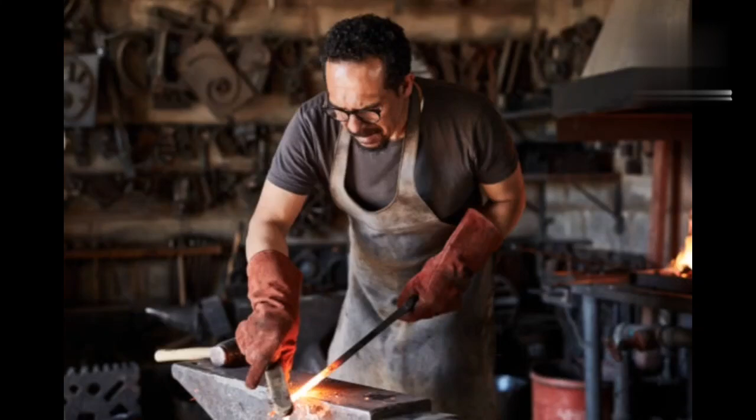Hey everyone! Today we are going to cover all possible Viva questions from Black Smithy shop.

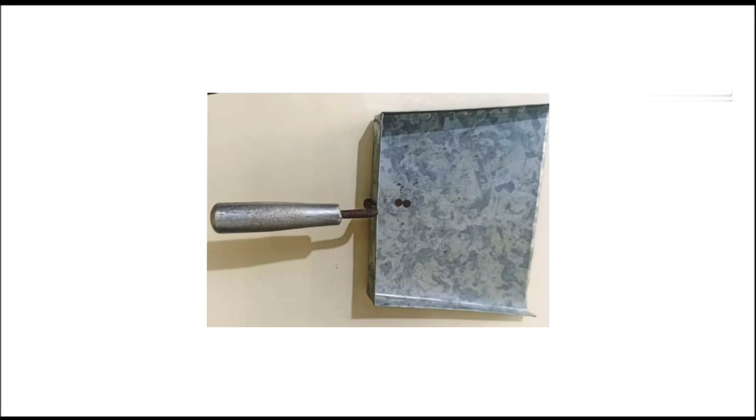So let's get started. First of all, let us understand the purpose of this shop. Basically, we are supposed to make a dustpan here, which has three parts: a galvanized iron metal sheet, a mild steel rod, and a handle. We are supposed to make the mild steel rod in the Smithy shop.

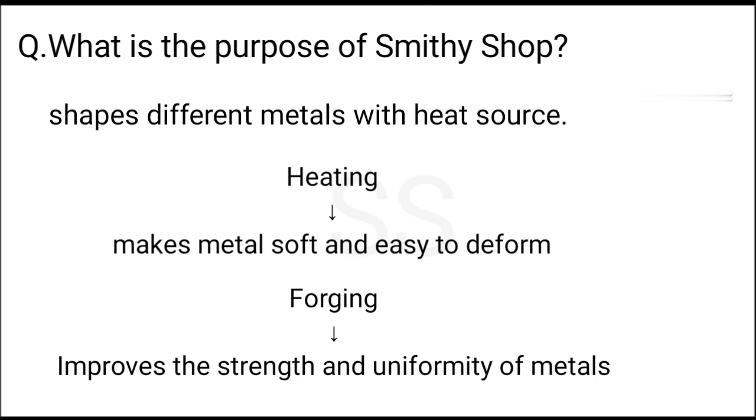Hence, we can say that a smithy shop is used to shape metals by heating and hammering them. Heating makes the metal soft and easy to deform. Forging improves the strength and uniformity of the metal, especially for parts subjected to continuous stress and load.

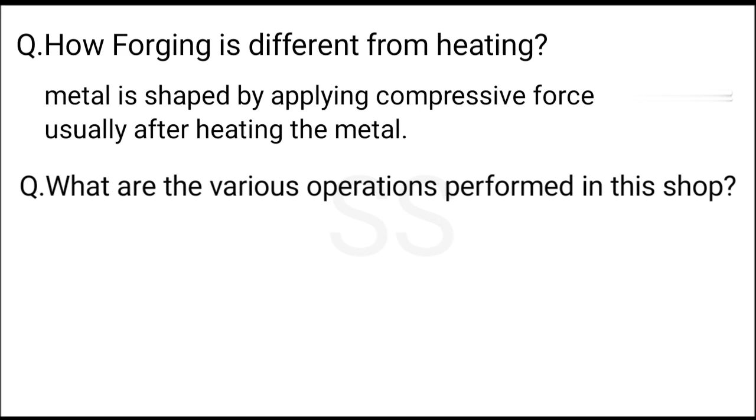Now, let's understand how forging is different from heating. Forging is basically a manufacturing process where metal is shaped by applying compressive force using hammering, usually after heating the metal. What are the various operations performed in this shop? The various operations performed include marking, cutting, heating, hammering, bending, drilling, riveting.

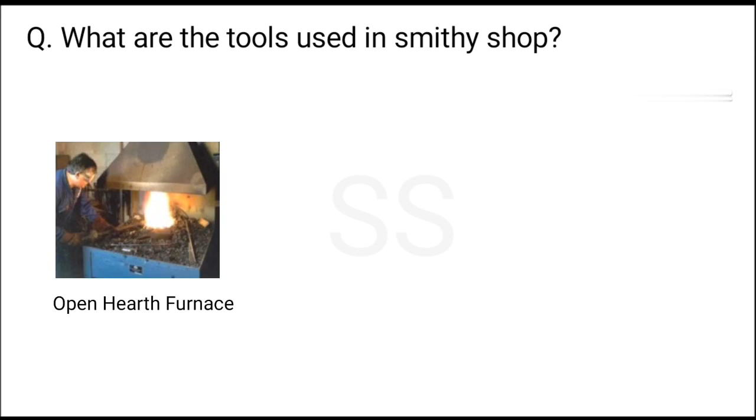Why is cast iron not used in smithy? This is due to high brittleness or hardness. What are the various tools used in smithy shop? The various tools used in smithy shop are open hearth furnace, anvil, hammer, and tong.

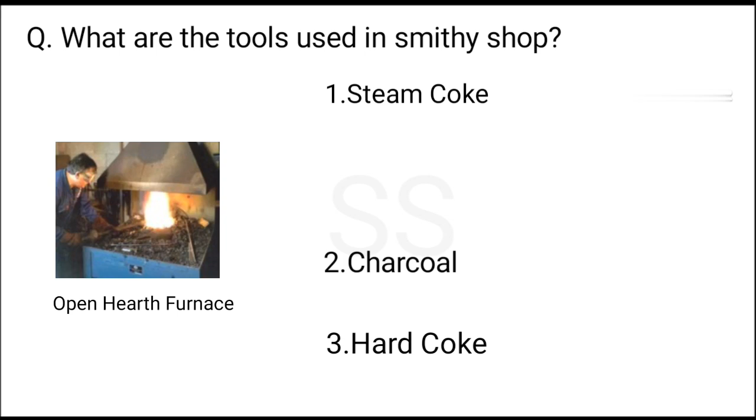Open hearth furnace can use three types of fuels. Those are steam coke, charcoal, and hard coke. Steam coke is named so because it was first used in railways, which run on steam. It has high carbon content. It is most commonly used in coal furnace. Charcoal is not used because it has low calorific value, and hard coke is used in foundry shop, which we will be discussing in upcoming videos.

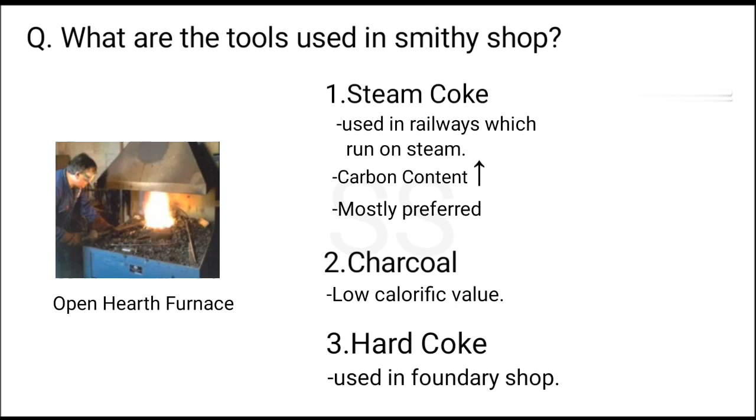Anvil comprises of beak, the outer sharp structure, and the body, which is also called as working face. It is made up of carbon steel and prevents deformation. Anvil also contains an area which is known as cutting block, where cutting operations are performed. We must perform cutting operation on the cutting block only because our raw material gets separated during cutting, and if it is kept on cutting block, the edge would not break. At other parts, the edge could break.

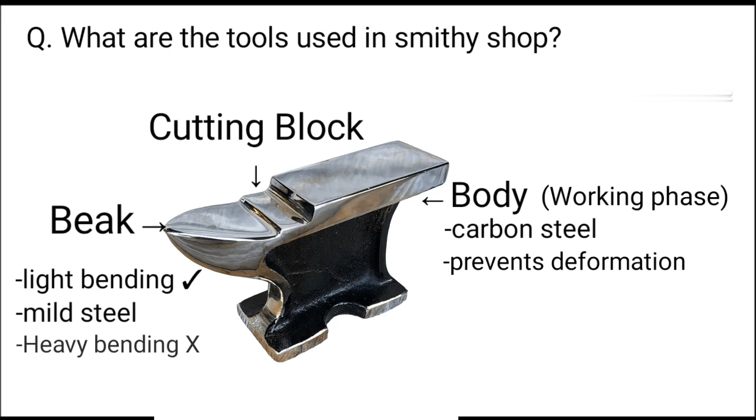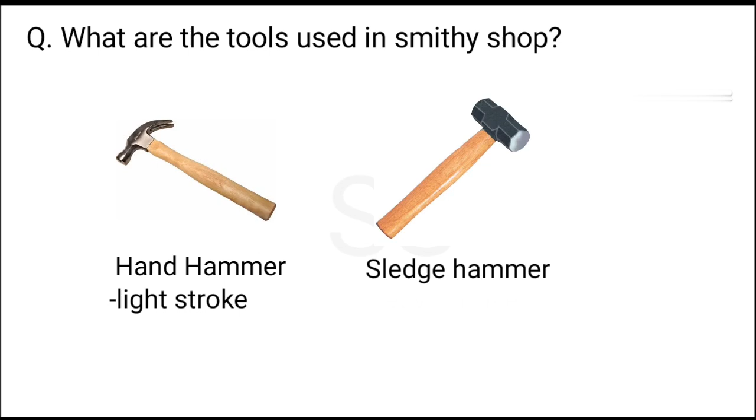Beak is used mainly for light bending operation and is made of mild steel. If we need to perform heavy bending operation, then we need to use leg vise instead of anvil, as heavy stroke on anvil could lead to jerk in our hand. Hammer is basically of two types: hand hammer and sledgehammer. Hand hammer is used for light stroke, while sledgehammer is used for heavy stroke. These hammers are made up of carbon steel.

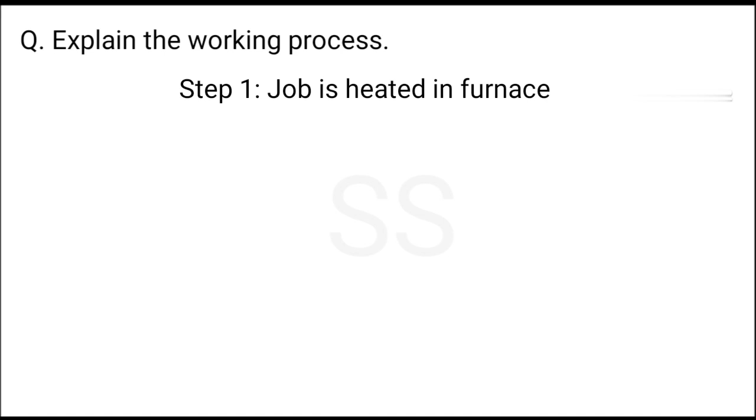Now, we can summarize the whole process as follows. First, the job is heated in the furnace, which is necessary because hammering without heating would develop cracks. After heating, it is held by tong and placed on the anvil, where it is given a suitable shape.

What is the range of heating and finishing temperature? The range of heating temperature is from 950 to 1150, and that of finishing temperature is from 750 to 950. These ranges differ, as heavy stroke at heating temperature would lead to decrease in size of the job. What would happen if heating is not done before hammering? This we have already discussed. Hammering without heating would develop cracks on the workpiece.

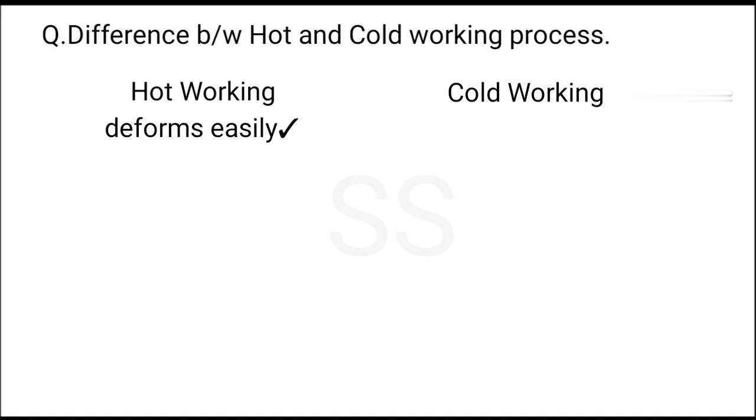What is the difference between hot working process and cold working process? Under hot working process, the material deforms easily, while in cold working process, the material would not deform easily. Also, surface finish is not better under hot working process. Hot working process is done above recrystallization temperature, while cold working process is done below recrystallization temperature.

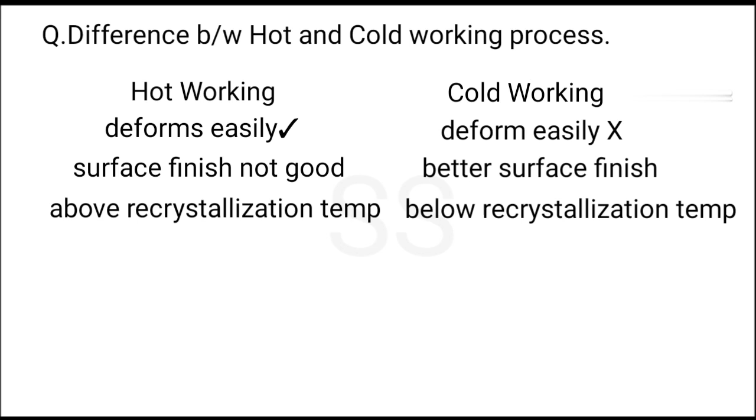What is recrystallization temperature? It is that approximate temperature at which complete recrystallization of cold-worked metal occurs within specified time.